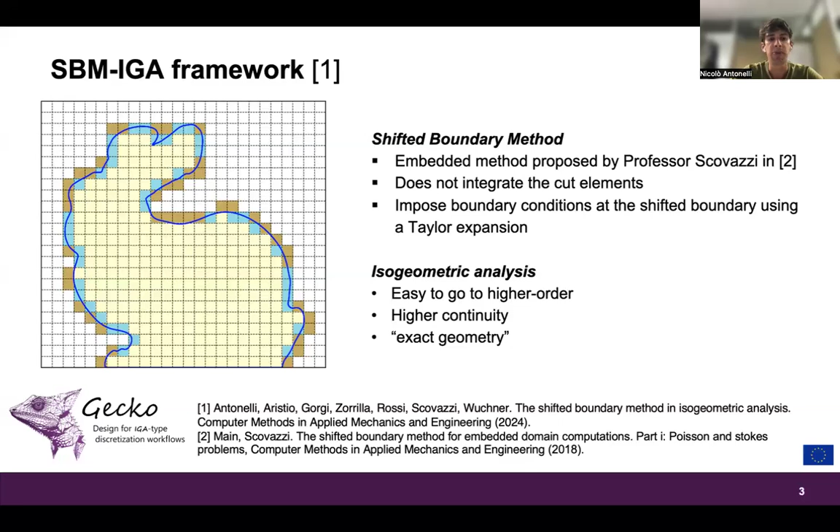Why? Because it's easy to go higher order, we can have higher continuity, sometimes it's very useful, and we can use exact geometry when we import NURBS. Advantages, of course, as all embedded methods, the boundaries are mesh independent. We can have optimal convergence for the Dirichlet. For Neumann, things are a bit more tricky, but we can say we can achieve at least suboptimal convergence

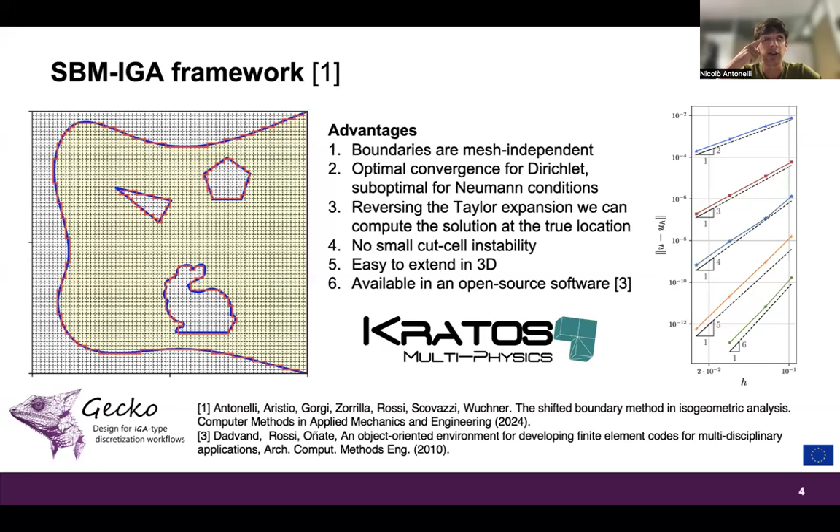of order P. At the end of the simulation, we can reverse the Taylor expansion and compute the solution at the true location. We don't suffer from the so-called small cut cell instability, very common in the majority of embedded methods. It's easy to extend into 3D, and actually we will see at the end that we did it, and it's already available in an open source software, which is Kratos Multiphysics.

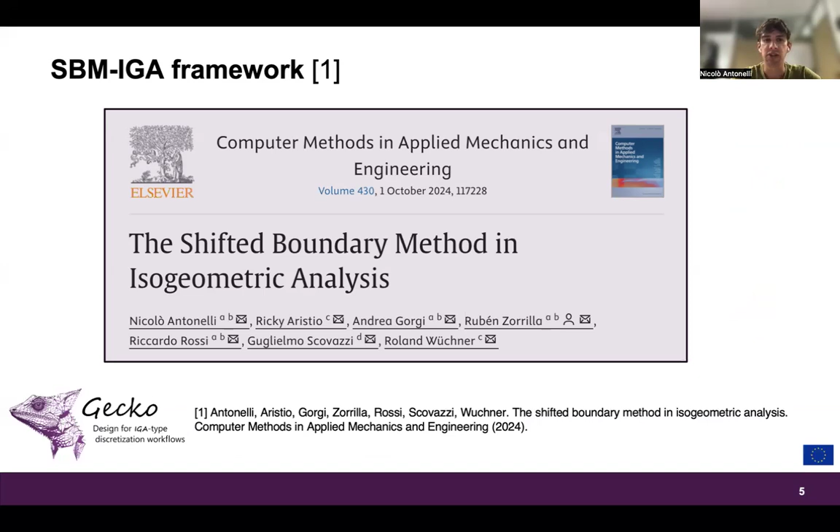The results of this framework have been described in this paper that is already 1 year old. I invite you to go and read it if you are interested. In this video, I will explain a bit the extension of that framework to Stokes fluid. We have already done it for Navier-Stokes, transient Navier-Stokes, but here the focus is on another slightly different topic.

So we have taken the simplest case, so Stokes fluid. We kept the constitutive law general in order to also simulate non-Newtonian fluids. We wanted equal order discretization, so we needed a stabilization, and we have chosen the variational multiscale. I left here some references. And finally, we want to implement everything in the same SBM IGA framework I have explained before.

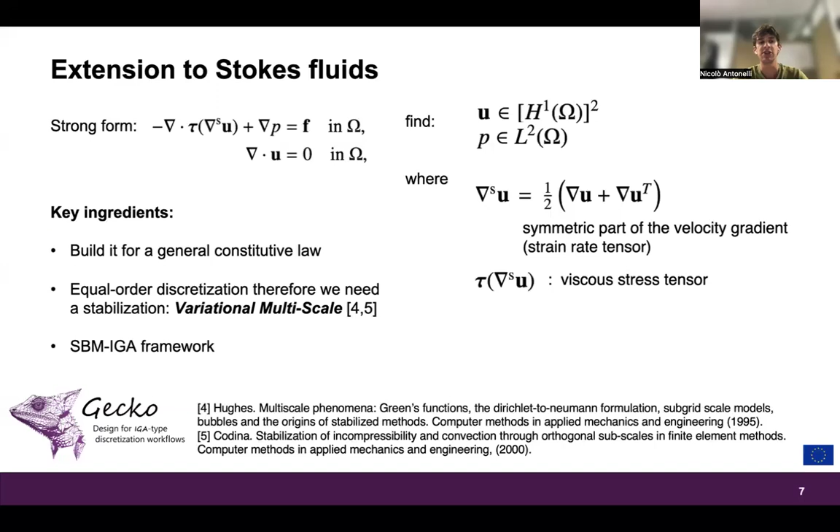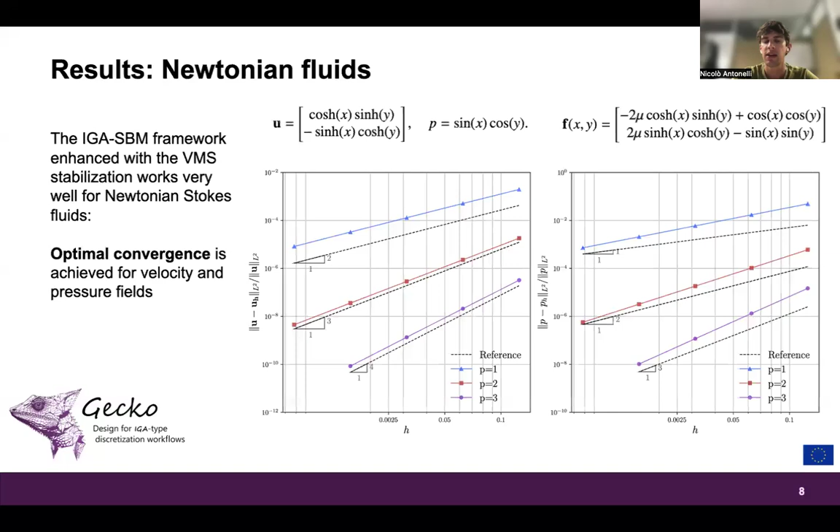We can start from a Newtonian case. We have taken a smooth solution. We computed the forcing we need for this Stokes problem, and we can see that we have optimal convergence for both velocity and pressure, P1, P2, P3, optimal convergence. Okay, very nice. What about non-Newtonian fluids?

Non-Newtonian fluids, we know they behave differently depending on the stress in general. They depend on a constitutive law that may be simple or more difficult, but they have change of material properties. They can have a sharp transition, so actually in general they are very difficult to simulate. Our hope was, okay, we use higher order basis functions and maybe they work better than linear finite elements because maybe they can represent better sharp transitions. This is our hope. Let's see.

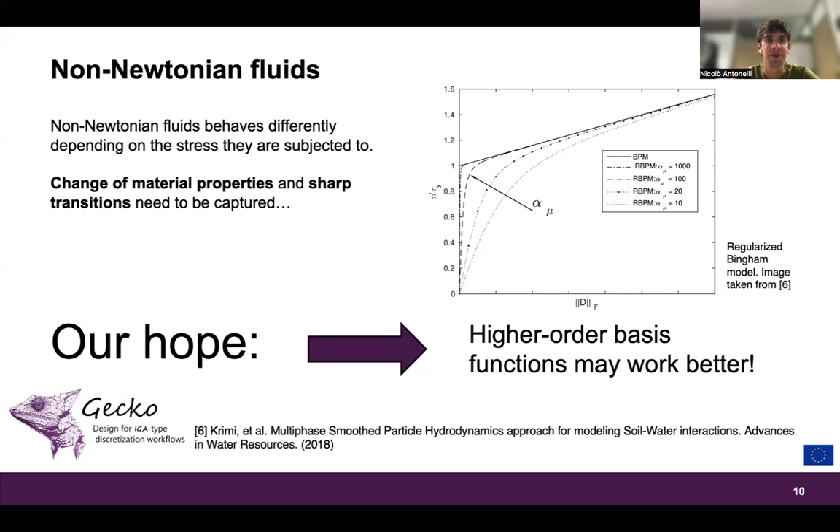So to do this, we have taken the Bingham fluid, Bingham constitutive model, that basically is a model I imagine as the toothpaste model, because when the stresses are below the yield stress, the fluid behaves like a solid in the sense that it can just translate or stay there. While where the stresses go above the yield stress, the fluid starts to behave like a Newtonian fluid, and that's why there is that linear behavior after the yield stress is passed.

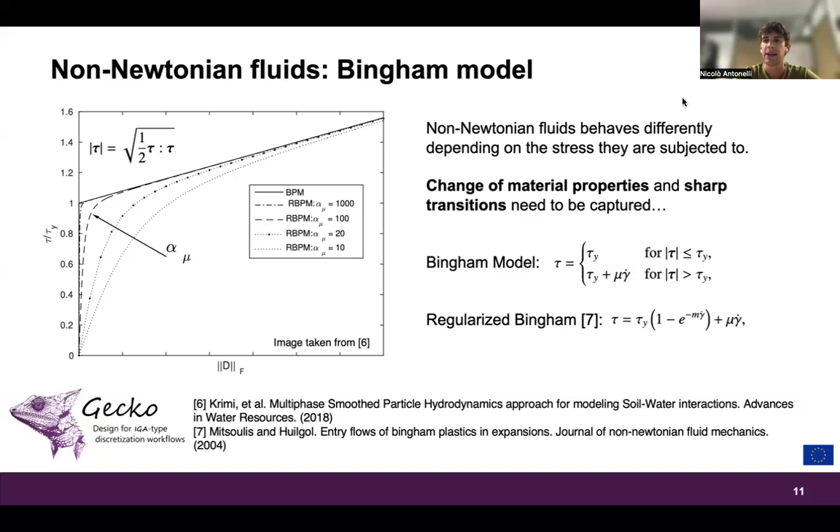Actually, we will use a regularized Bingham model in order not to have very sharp transitions that are very difficult to simulate. But still, it's a strong transition and a quick change of material properties, as we will see later. So to start, we have taken the same smooth solution as before. We have computed the forcing such that we can get this solution with that constitutive model. It's a technique just to check if, at least for a smooth solution, IGA is working well. And actually, it is.

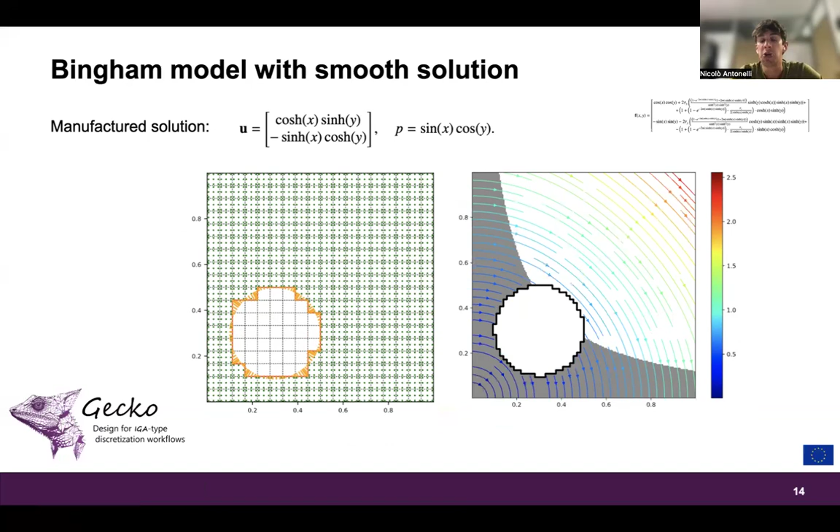So this is the solution. We have also inserted an embedded circle using the SBM, also to check how the shifted boundary method behaves with non-Newtonian fluids. And actually, in both cases, with the immersed circle on the right and without any embedded circle, we have optimal convergence. We can see from this, this is the velocity convergence. In both cases, it is similar.

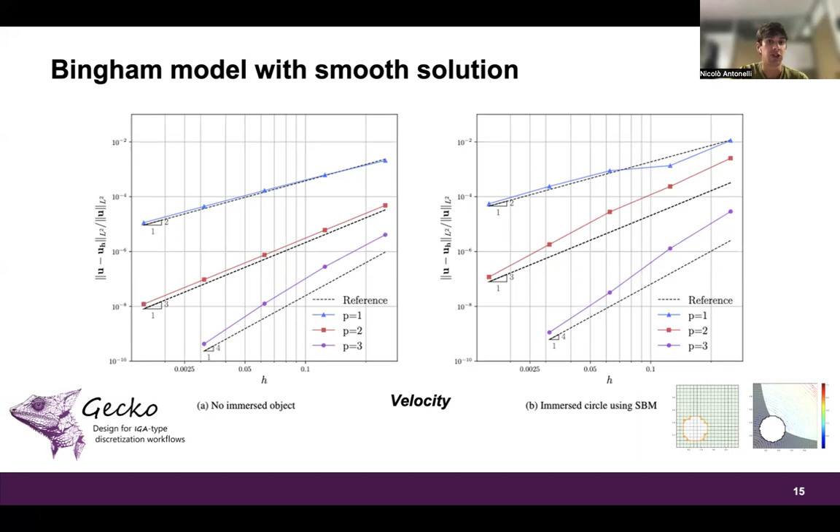Of course, with the SBM, all the curves are shifted a bit above because we are introducing an approximation, imposing the boundary condition on the surrogate boundary, and the same for the pressure. But still, optimal convergence is obtained. Very nice. So what we can see now is that with higher order basis functions, smooth solutions seem to work very well.

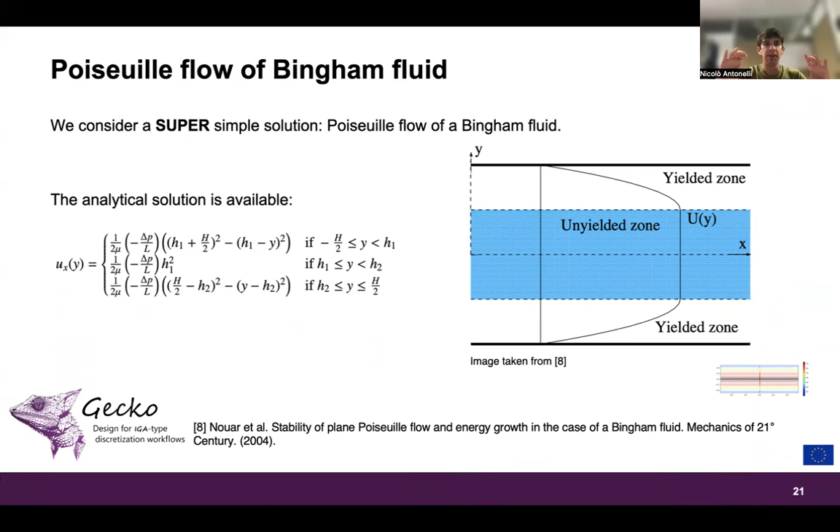But what about a more physical solution? What do I mean by physical? For instance, not super physical, but still more physical than before. We can take a Poiseuille flow of a Bingham fluid. This is basically a Bingham channel, a Poiseuille flow. We put some Bingham fluid inside, and actually an analytical solution is available, and it is simply a piecewise quadratic solution. We can see the profile in this picture.

We have two branches of parabola on top and close to the two walls, because there the stresses are higher, and therefore the Bingham fluid behaves like a Newtonian fluid, so a parabola, branch of parabola. In the middle, we have the unyielded zone where the fluid behaves like a solid. So we have just translation with no deformation. Okay, so piecewise quadratic solution, I was expecting, okay, I can use P2 IGA basis functions.

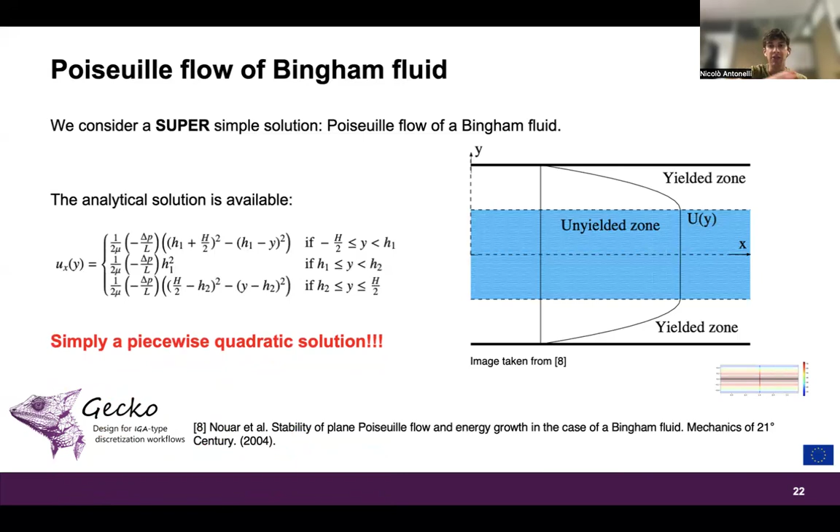I will get immediately, no matter which mesh, the analytical solution. This is simply a piecewise solution everywhere. So it's constant in the middle and a parabola close to the walls. But actually, what we obtain is that, okay, P1 converges with second order convergence as expected, but P2, P3, P4 up to P6, at most, we have obtained second order convergence, not more than second order.

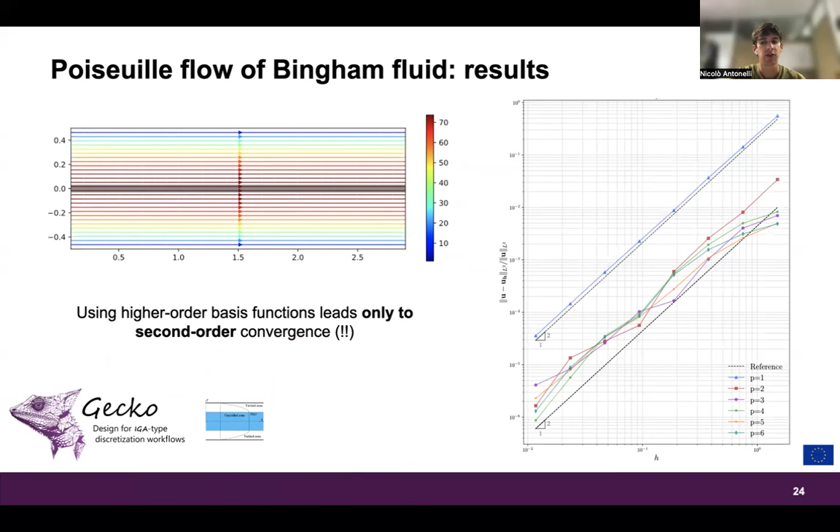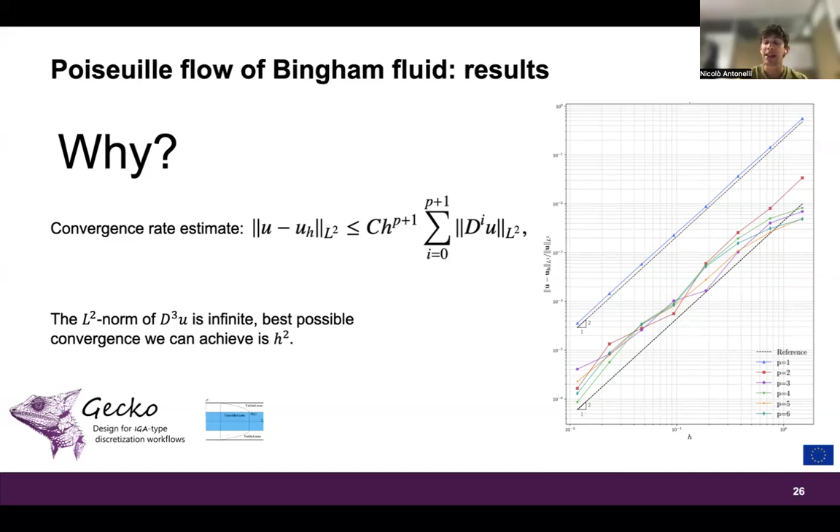Why is this? We have found the answer to this question in the literature, because the convergence rate estimate has a limit that depends on the highest finite derivative of the exact solution in the L2 norm. And in our case, the solution looked very smooth, but actually it was piecewise quadratic, as I said, and there was a discontinuity in the second derivatives that leads to a singular point in the third derivative of our exact solution. Therefore, the third derivative is not square integrable, and therefore the limit of this estimate was actually 2. That's why we got at most second order convergence. So this was actually expected from the literature.

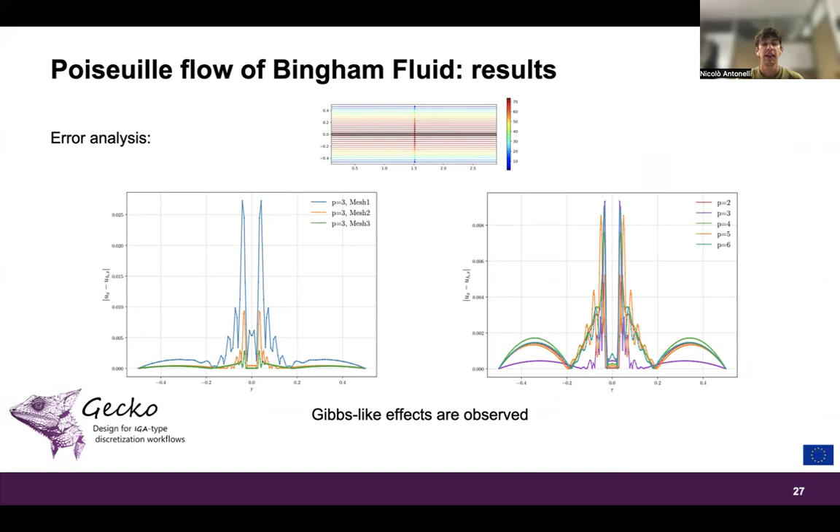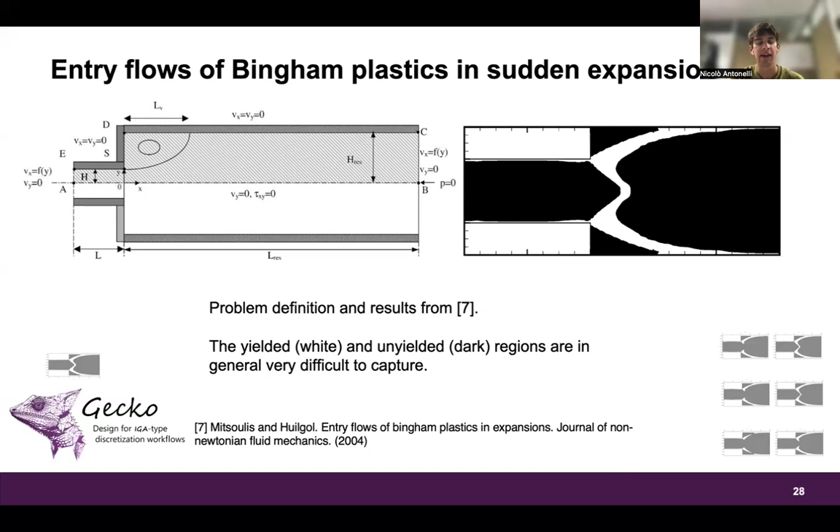And we can see here the absolute error, and we can see some Gibbs-like effects close to the two lines, two points where we have the change of material properties. We can also go to a more complex benchmark, which is entry flow of Bingham plastic in sudden expansion. This is the geometry, and on the right you can see the benchmark solution from the literature. In black we see the unyielded zone, solid-like regions, and in white the yielded zone where the fluid behaves like a Newtonian fluid. And our solution with P1 with a very fine mesh, which is not easy to get, is in perfect agreement with the reference solution, very nice.

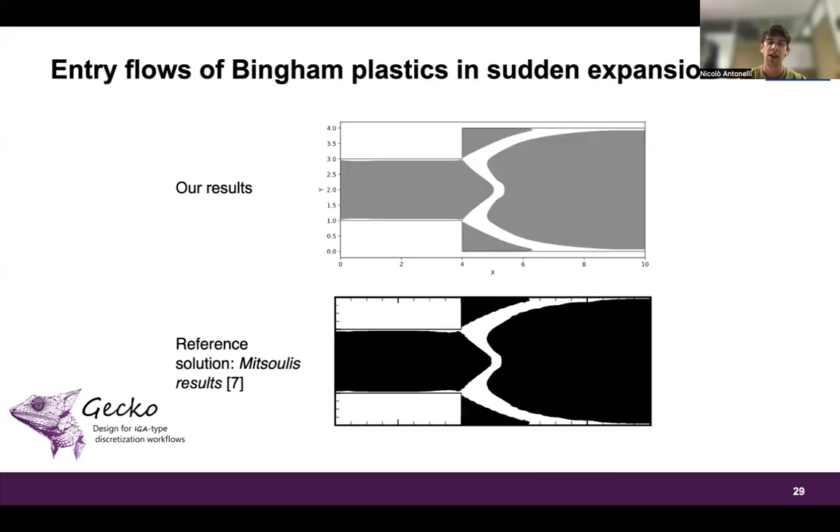But what we are interested in in this talk is how higher order basis functions perform. And the answer is P1. To answer this question, we have taken two different meshes. First column coarse mesh, second column a finer mesh. First row P1: we can see that the coarse mesh captures a bit the behavior of the physics, but not perfectly, especially in the center of the channel, where you need a very fine mesh to get the full contour of the yielded and unyielded regions. But the fine mesh captures it quite well already.

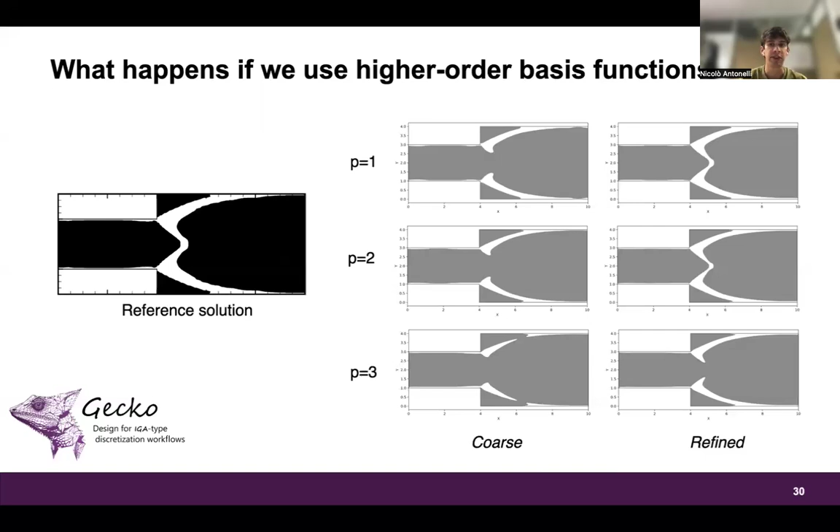If we go to P2, similar results, slightly worse than P1, using the same mesh. And P3 is the worst of the three, and even the fine one cannot capture the behavior at all in the center of the domain. So this is very bad news. This was unexpected from our side. Why is this? Probably because in this case, the analytical solution was not available, but for sure it has some sharp change of material properties due to the Bingham constitutive law. And the exact solution probably has some discontinuity in the second or third derivatives. We don't know because it's not available. And this limits the convergence, and it can make it even worse than P1, probably because of some crosstalk effects of the larger support of the basis functions in IGA.

So to answer the question, IGA probably is very good for smooth solutions, even in fluid dynamics, even for non-Newtonian fluids, but when you know that the solution is smooth. While for more physical solutions, when you don't know, or your constitutive model can introduce some kind of discontinuity in the exact solution. Even the Bingham problem looked very smooth, but actually, if you investigate, it's not smooth at all. Already the third derivative has a singular point. Probably IGA is not the best way to simulate this kind of fluid. You can still do some local refinement close to the change of material properties. This for sure would help.

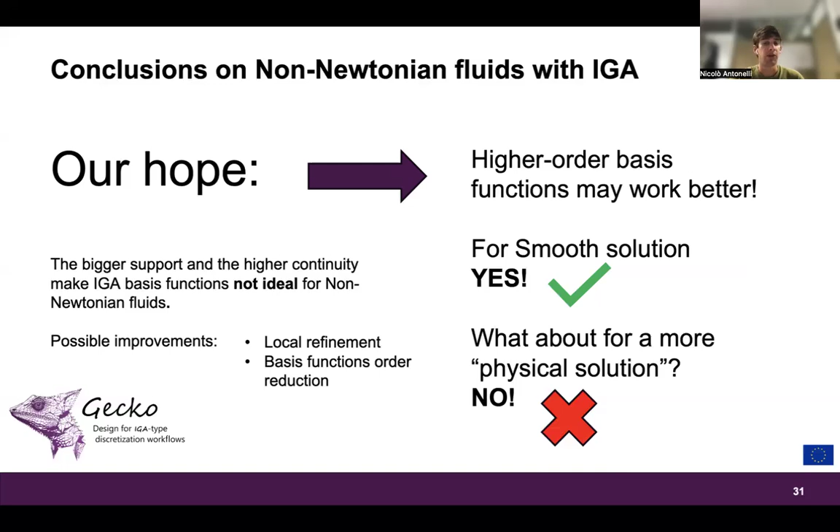Or basis order reduction in the area where you know that you don't have that much continuity; probably using P1 in that area will partly solve the problem. While in the area where you know that you have a smooth solution, maybe far from the change of material properties, it makes sense to increase the polynomial order and use IGA. This is the result of this second paper published last month. So if you are curious or interested, please look for this paper.

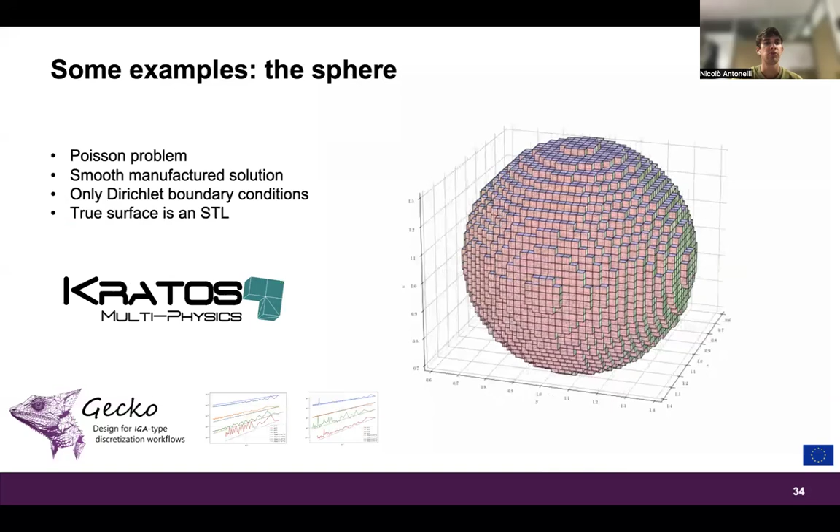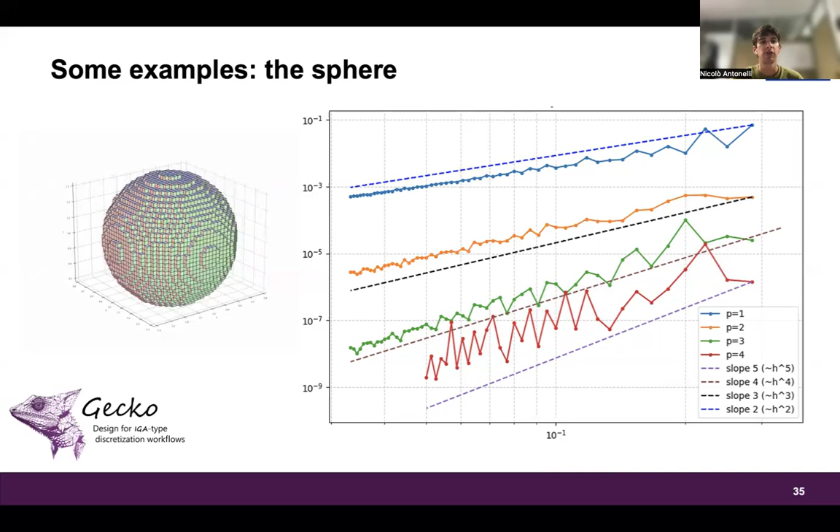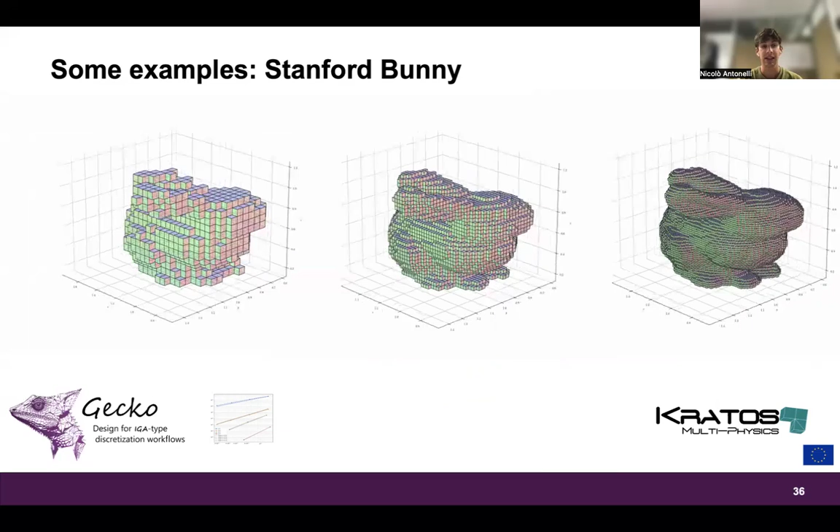Finally, very quickly, some potential of the SBM-IGA framework in three dimensions for a simple Poisson problem with Dirichlet boundary conditions. We can see that we have optimal convergence for Dirichlet, suboptimal for Neumann boundary conditions, but the real potential is that we can simulate very complex geometries, even in 3D, something that for the majority of embedding methods is not easily extensible to 3D. Here you can see that it's quite robust, and we can simulate the 3D Stanford Bunny with optimal convergence also in this case. We can even simulate more complex shapes like this mechanical component full of details.

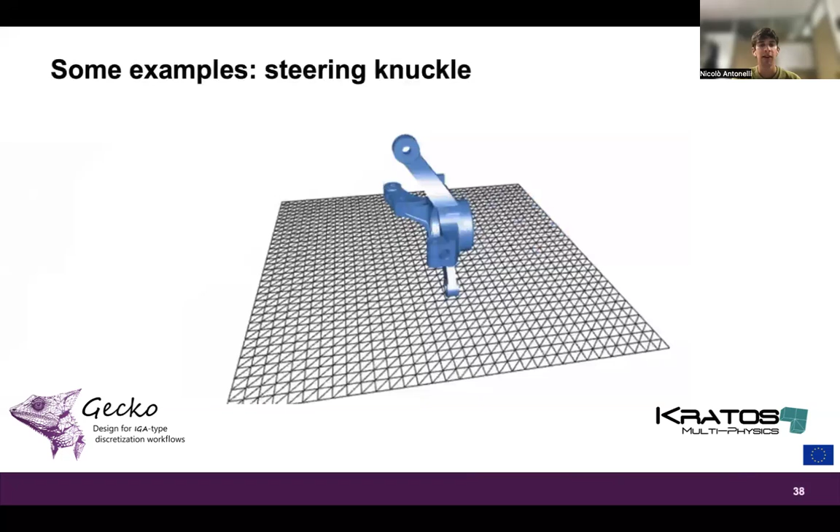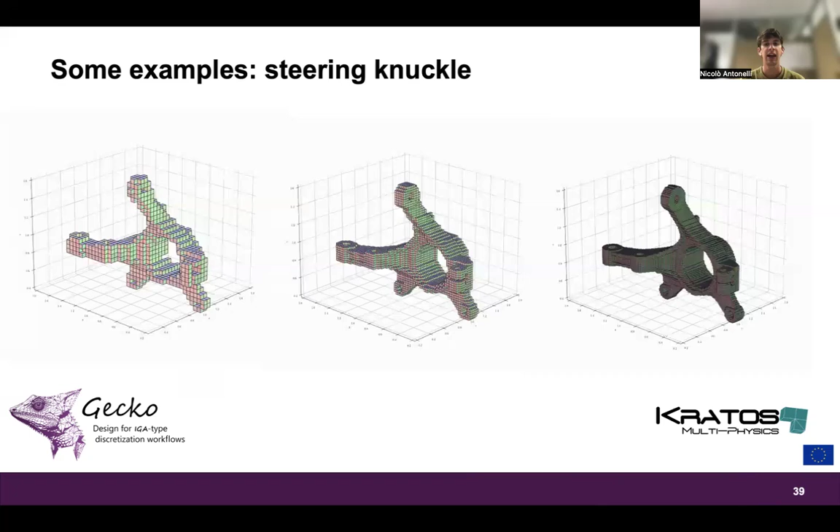And of course, if we use a mesh that is too coarse, we will lose some details of the geometry, but as we refine, we recover all those details. And the real advantage of this is that for large deformation, or if we have a moving body, we don't have to remesh every time. We just have to recompute the surrogate boundary, the surrogate surface in this case, which is a very easy and cheap procedure. This is all.